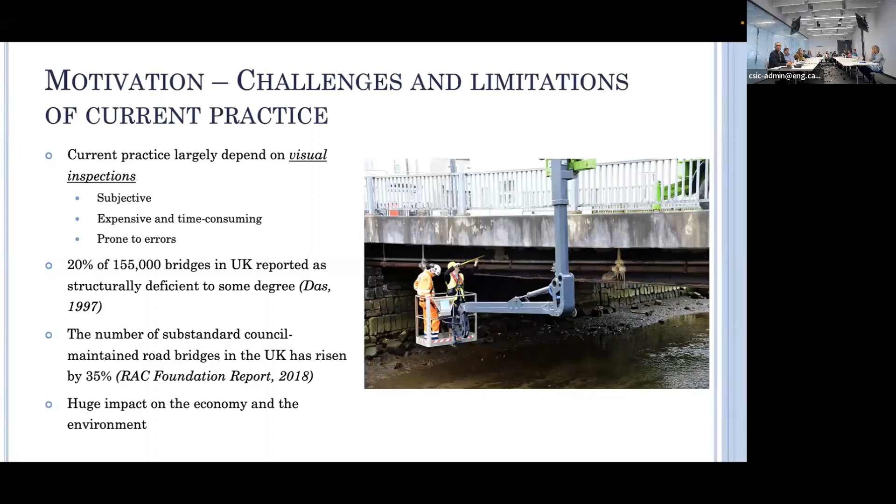As a result, thousands of bridges in the UK, and it's the same all over the world, are deemed structurally deficient, because visual inspections provide conservative results. Some of these structurally deficient bridges are being demolished and replaced, and on many of them weight restrictions are put, which has a huge impact on the economy and the environment.

Before discussing quantitative-based bridge assessment or evaluation approaches: although in practice lots of bridges are deemed structurally deficient, in the literature the studies tell a completely different story. For many bridges tested to failure, it was demonstrated in various studies that bridges are actually much stronger than we think.

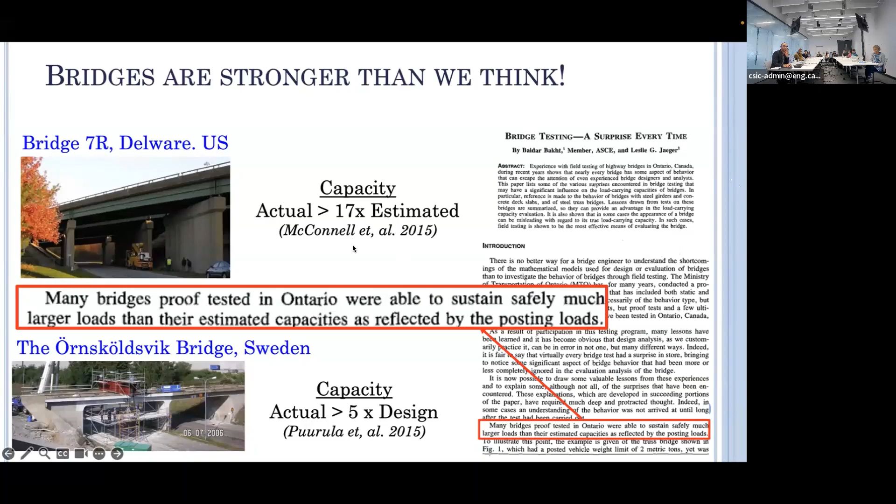For instance, there's a very good paper called Bridge Testing — A Surprise Every Time. The authors proof tested dozens of bridges in Canada, and all of them could sustain more loading than reflected by the bridge load postings. Another bridge in the US was tested to failure, and it could sustain 17 times more than the load estimated using conventional conservative approaches. So it's important to understand where the additional strength comes from.

It comes mainly from uncertainties involved in the guidelines used by practitioner engineers, mainly related to how the structural behavior is idealized or the material properties used. One of the main sources of uncertainty is traffic loading, which is highly variable, obviously. And the traffic load models included in the design or assessment guidelines are very conservative.

As an example, the figure here shows Load Model 1. All highway bridges designed and constructed in Europe should be designed to sustain its load actions. It has 2 axles spaced 1.2 meters apart, exactly the same dimensions as probably the smallest car in the transportation network, a Smart car, but it has a gross vehicle weight of 67 tons, almost 50% heavier than the 4-axle truck with a maximum gross vehicle weight of 40 tons.

This 4-axle truck generally imposes the most onerous load actions on a standard bridge, like a span of 20-30 meters. So that kind of shows how conservative the current design guidelines could be.

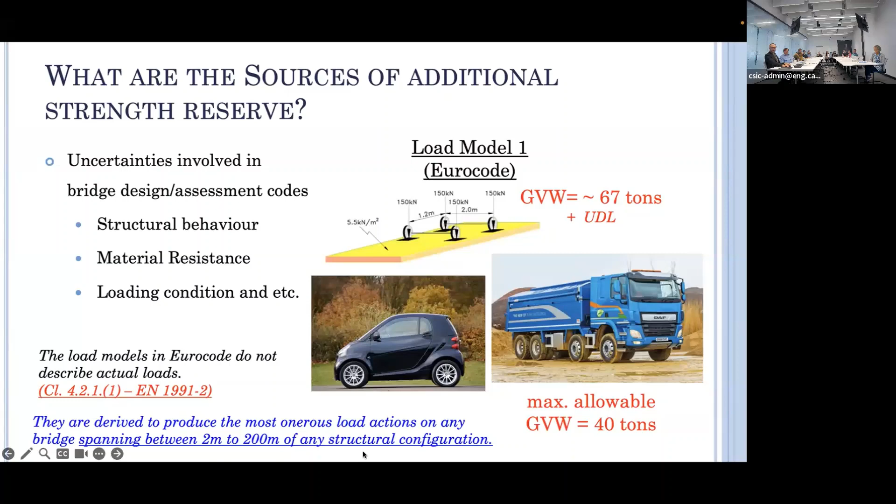So that's the main motivation to develop more quantitative and accurate bridge assessment guidelines. This project started several years ago when Network Rail had a project called Staffordshire Area Improvement, back in 2015. This project aimed to reduce the bottleneck in these 2 locations, Stafford and near Norton Bridge Village.

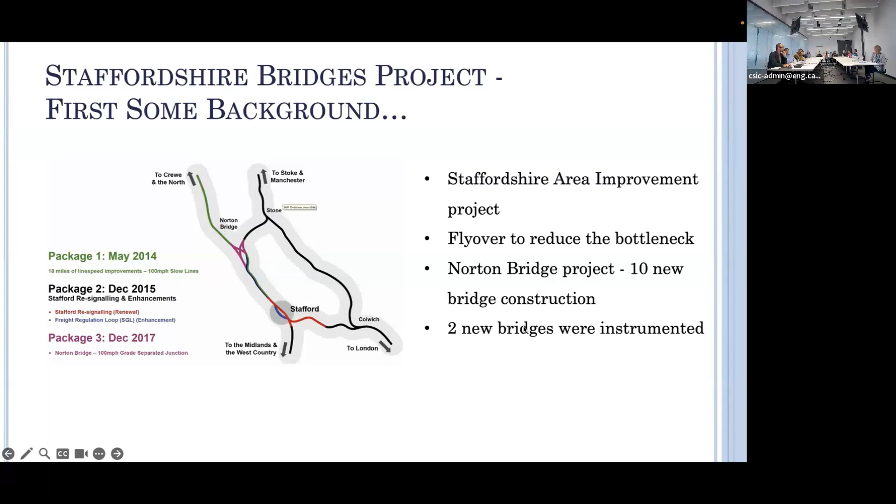Eventually, Network Rail built flyovers, and as part of the Norton Bridge project, 10 new bridges were constructed, and our research group was given the opportunity of instrumenting 2 new bridges during the construction phase, called Chebsey and Norton Bridge. They're very closely located near Stafford City.

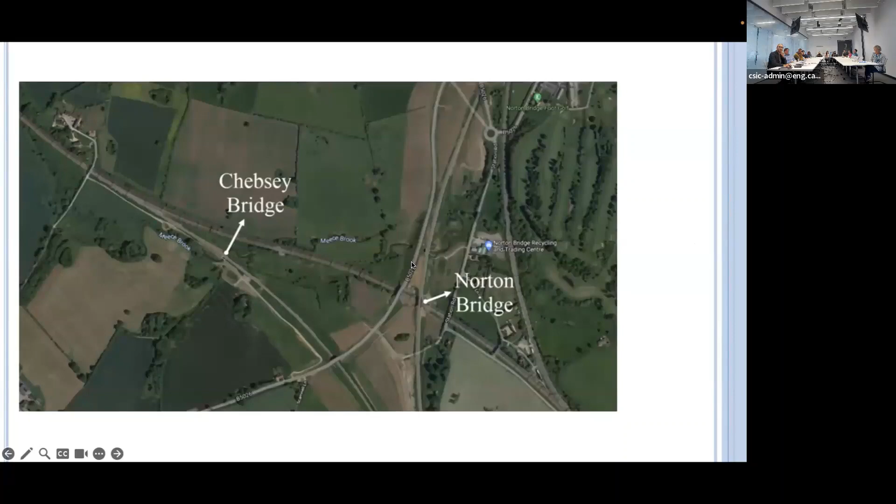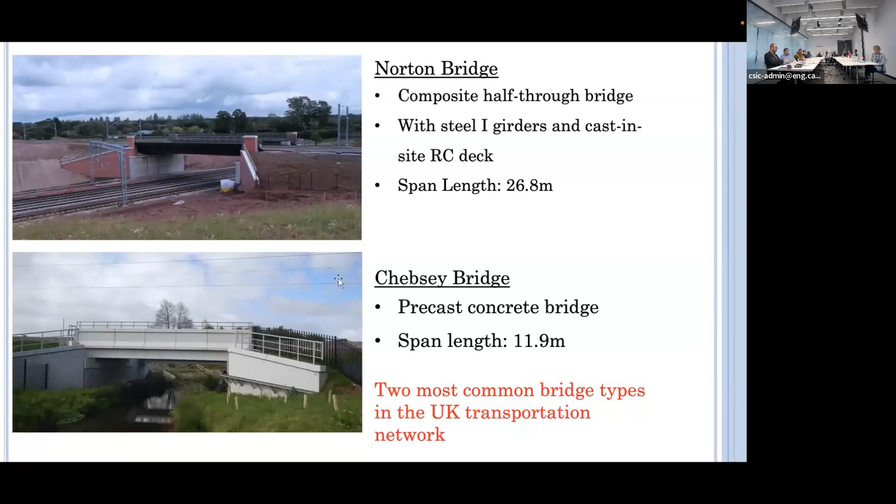Norton Bridge is a half-through composite railway bridge spanning 26.8 meters and has 2 I-shaped main girders, and Chebsey Bridge is a precast pre-stressed concrete bridge with a shorter span, about 12 meters. These are the 2 most common bridge types in the transportation network. Both bridges were instrumented with fiber optic sensors during the construction phase.

For the Norton Bridge, the top and bottom flanges of both main girders and 2 cross beams were instrumented with FBG sensors. FBGs basically measure strain and temperature. Fiber optic cables were also embedded into the reinforced concrete deck slab at the mid-span location, plus pre-stressed sleepers were also instrumented with FBGs. Overall, we had 291 FBG sensors on the Norton Bridge.

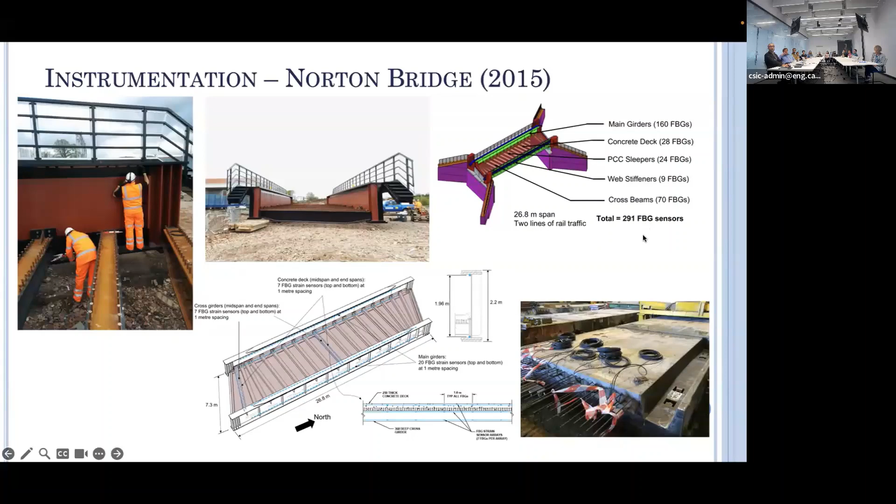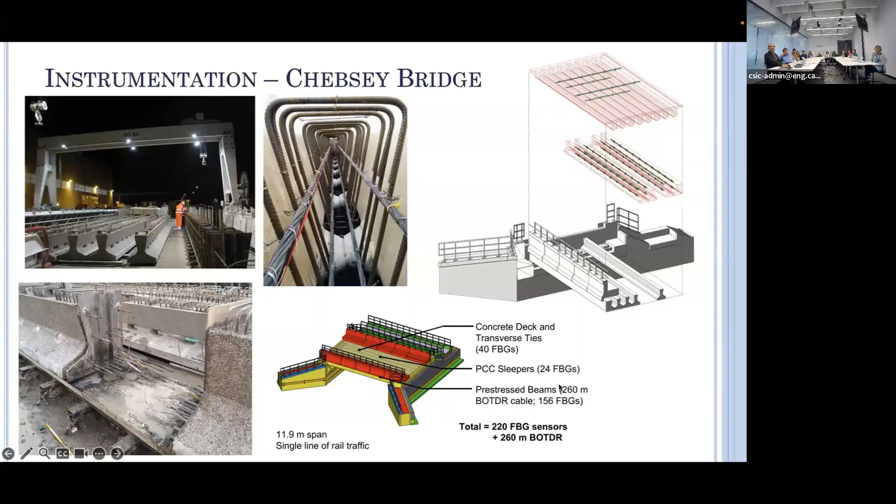Chebsey Bridge, since it's a precast bridge, the main girders were instrumented with fiber optic cables at the precast facility. So fiber optic cables were routed along the pre-stressed tendons, and at the construction site we instrumented the deck slab at the 1/4 and 3/4 span locations. Plus we have 3 pre-stressed sleepers instrumented with FBG sensors. Overall, we have 220 FBG sensors on the Chebsey Bridge.

The first 2 phases of the Staffordshire bridges were completed by 2017. The main objective of the first 2 phases was to investigate the feasibility of using fiber optic sensors for long-term bridge monitoring applications. Initially, we didn't have any permanent power on site. We acquired data during short site visits, which involved setting up a tent next to the cabinet and using a generator to power up the data acquisition systems.

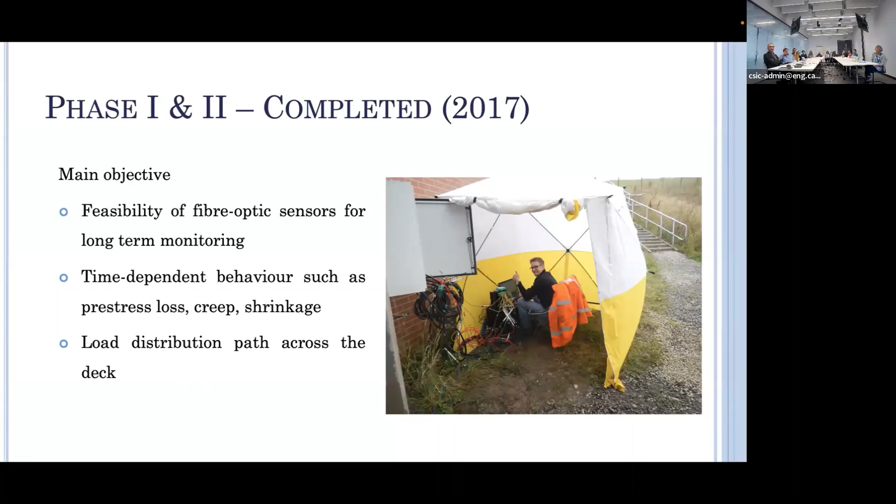The early data acquired from these bridges were mainly used to study time-dependent behaviors such as pre-stress loss, creep and shrinkage. A researcher also looked at the load distribution path from the sleepers to ballast and to the main beams. Then in 2020, we received further funding from CDBB, Centre for Digital Built Britain, to develop a continuous monitoring system for the Staffordshire bridges using a digital twin.

A digital twin is a realistic representation of a physical asset in the digital world. One of the main challenges of building the digital twin was providing this connection between the physical and virtual twin. Our digital twin system is empowered with built-in data processing algorithms, which take raw site monitoring data and extract information useful for us or asset managers, such as what's realistically occurring on site, like traffic loading, or understanding the structural behavior better.

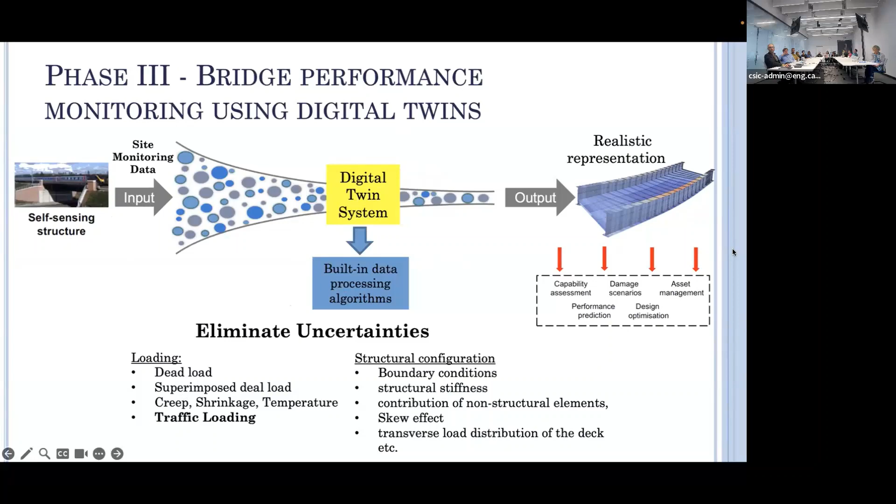Developing a digital twin system first required providing that continuous connection between the physical and the virtual twins. That required setting up a continuous monitoring system. As I mentioned, initially we didn't have any permanent power on site. We asked Network Rail to provide the power, and it was installed in January 2021. The cabinet on the right-hand side shows the data acquisition system that we've developed. It replaced the old cabinet, which only contained the ends of the fiber optic cables, with a new cabinet that has the data acquisition and transfer system.

And it was installed in November 2021, so almost 2 years ago. While Network Rail engineers were working on site and installing permanent power, we used this opportunity to install some additional sensors for several reasons. One of the main reasons, actually, we wanted to set up a train load monitoring system, since, as I mentioned, traffic loading is one of the main sources of uncertainties. Setting up a train load monitoring system required additional information.

In addition to deformation monitoring, we also required accurate positions of the axles, which wasn't possible to obtain using the existing system, or at least on both tracks. So we developed this axle detection system using laser rangefinder sensors. Laser rangefinder, short name LRF. LRF is a sensor that beams light at a high frequency in order to measure distance.

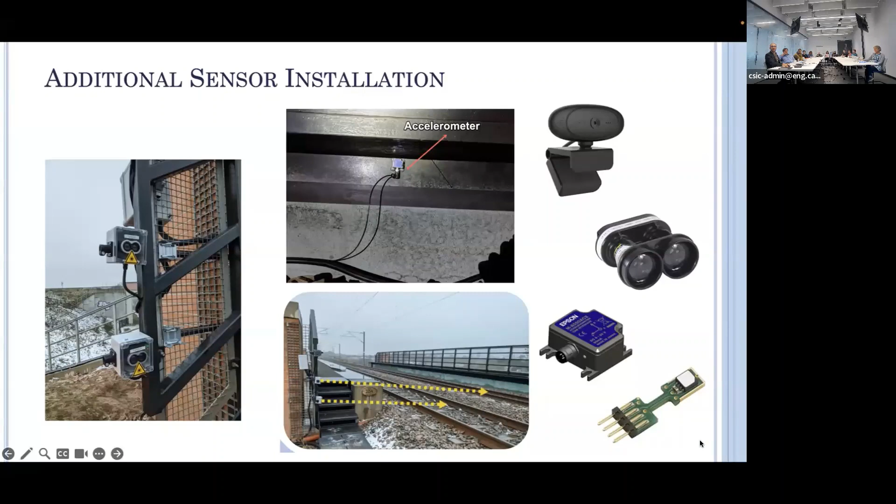Achieving time synchronization was vital for this project, especially for setting up a train load monitoring system, because the algorithm, which I will explain in the following slides, looks at the relation of the measured deformation and the axle positions in order to predict the individual axle weights.

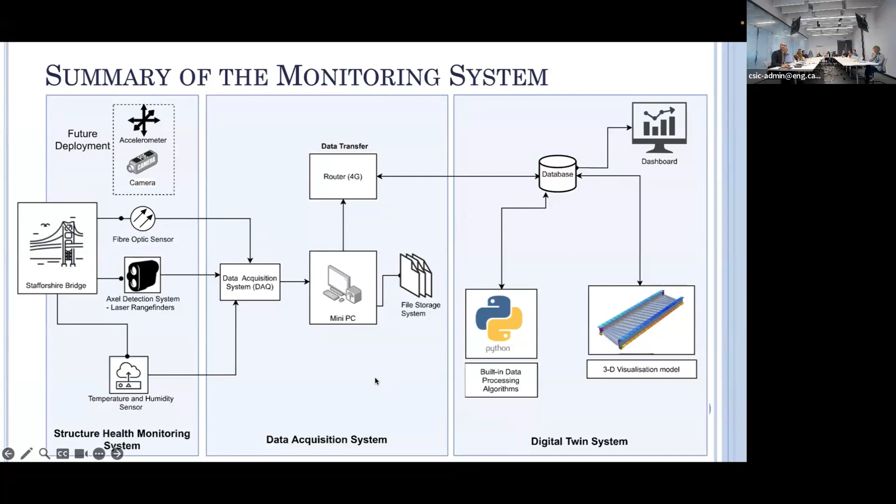Once the data is in the database, our digital twin system, which is integrated with data processing algorithms, processes all site monitoring data and extracts the useful information. In this next part of my presentation, I will show the live demonstration of the digital twin system that we have developed. This is the landing page of our digital twin system. So far, we have developed 4 dashboards, and I will go through each dashboard one by one.

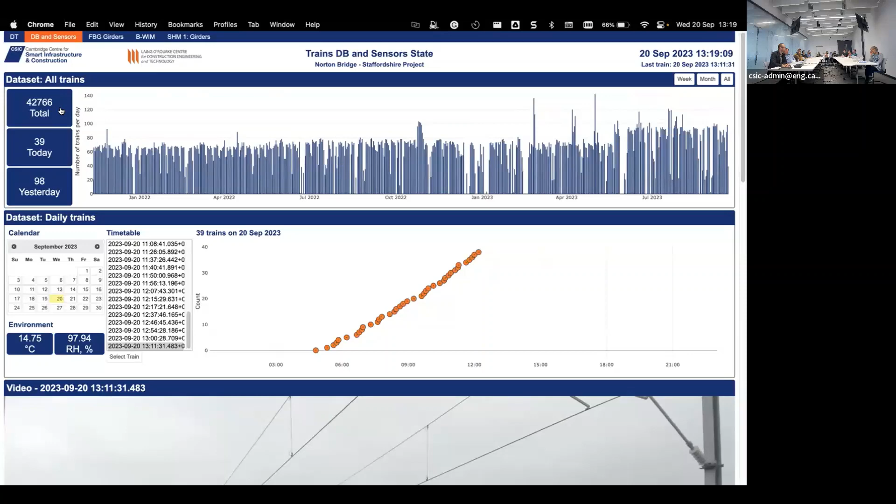Sorry. So the first dashboard is developed to access and visualize the site monitoring data. The bar plots at the top show the daily train crossings. On average, up until recently, we were getting roughly between 60 to 80 daily train crossings, but recently, throughout this summer, the daily train crossings increased to somewhere between 80 to 100. So far, we have acquired data during the crossing of more than 42,000 trains.

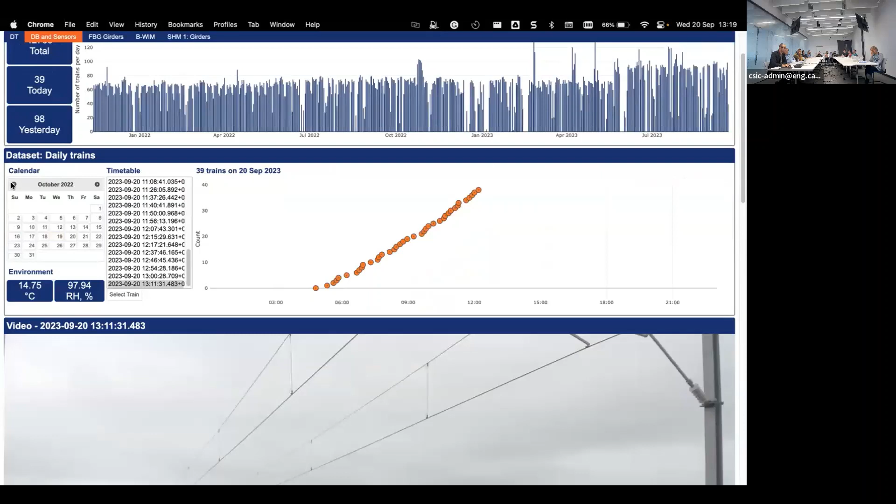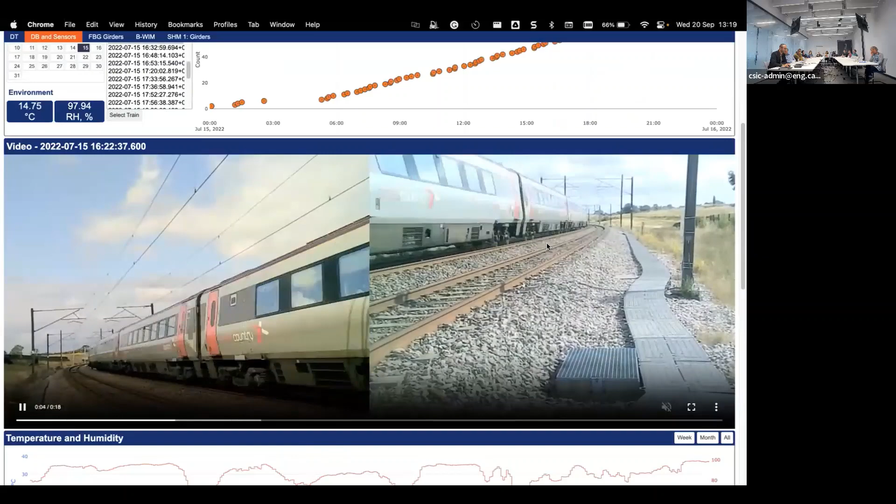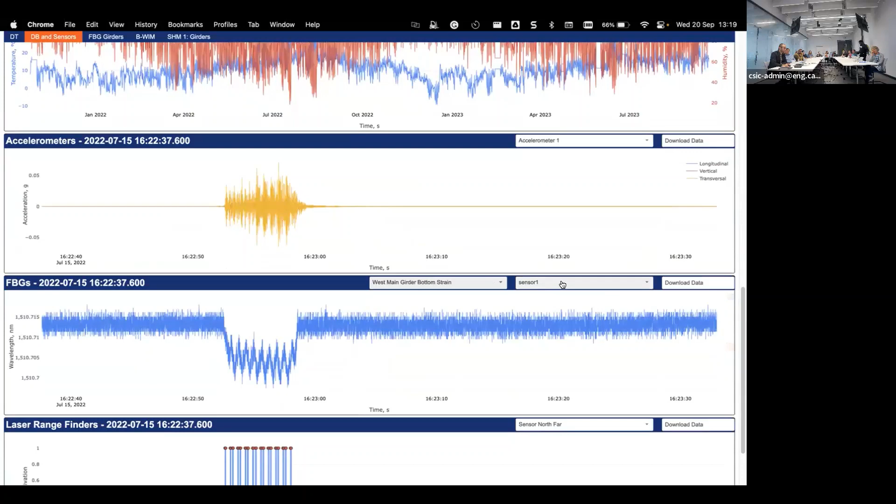Then we have the calendar and the timetable that allows us to go back in date all the way to November 2021 and select any train crossing. Here we see a Super Voyager Class 220 or 221 train crossing our bridge site, and we have these temperature and humidity time series. Then we have 4 accelerometers, and then we have FBG fiber optic strain data. We have 16 cables. Each cable has either 20 or 7 sensor nodes.

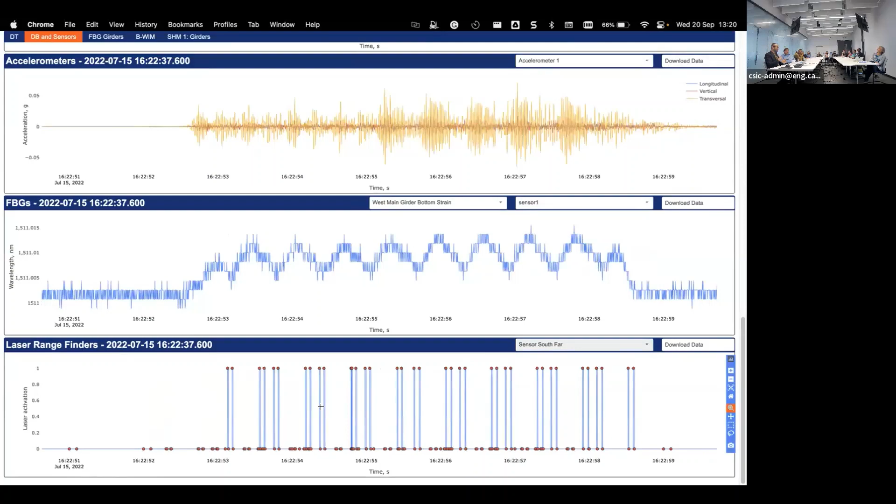Here we have these time series from the axle detector. Each peak corresponds with an axle entering or leaving the bridge. These 2 closely spaced peaks correspond to the passage of a bogie. We have this sensor at north, the entrance of the bridge, and south, which is the exit of the bridge. Knowing the axles entering and leaving, we can predict the speed and then identify the position of individual axles at any point in time.

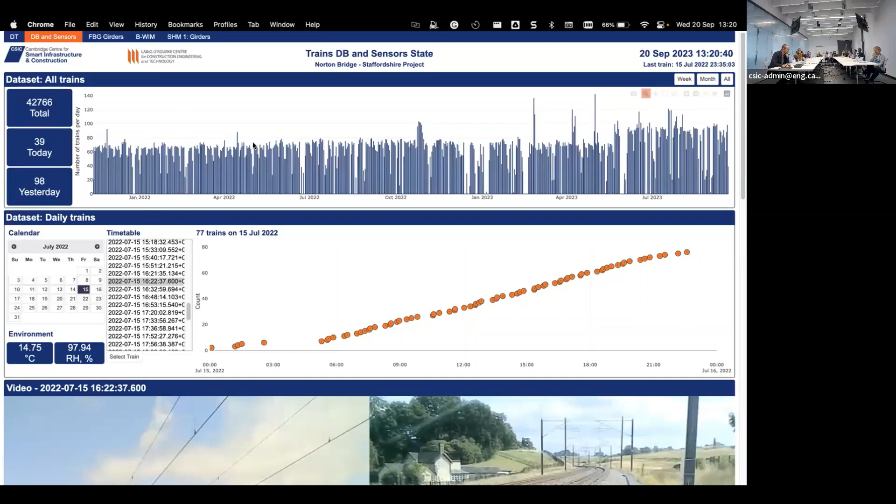So that's the first dashboard, which we mainly use for visualizing and accessing data. The second dashboard that we've developed is for the real-time train load monitoring system.

So we developed this train load monitoring system based on a technology called bridge weigh-in-motion technology. So I've included 2-3 slides to explain what a BWIM system is and what it does. So BWIM is a system that uses the deformation induced by a passing vehicle, and it solves an inverse type problem. It back-calculates the axle weights; basically the algorithm is based on the influence line, and it predicts the axle weights based on the fact that the deformation response is equal to the sum of the product of the axle weights and influence line.

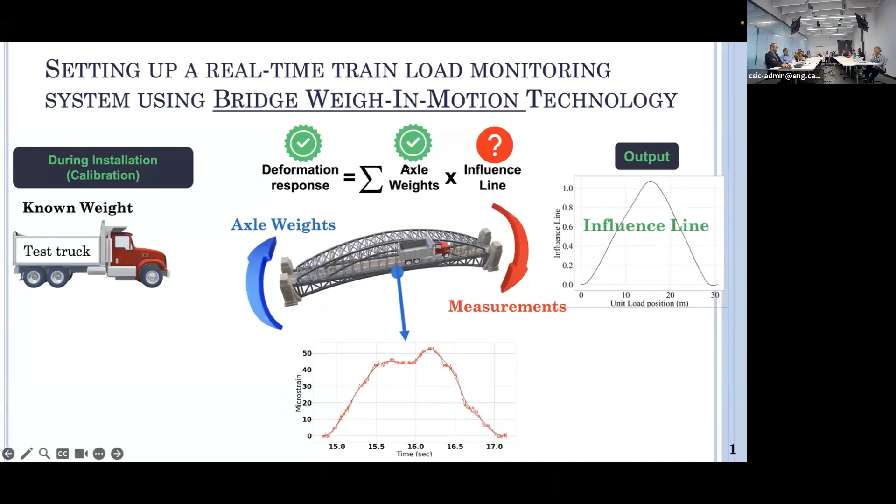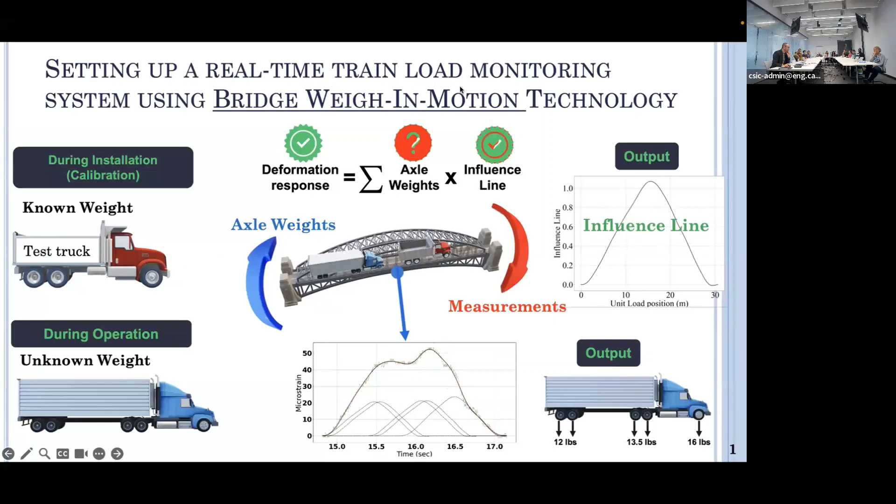So influence line is the response of a bridge to a single moving unit load. Bridge weigh-in-motion installation typically requires calibration during the installation phase, and the influence line is first obtained using the deformations obtained during the passage of a vehicle with known axle weight. So in the expression, deformation is always known because we measure it, and the axle weights of the test truck are known, and the only unknown in the expression is the influence line that we obtain during the calibration phase. Then once the influence line is obtained, during the operation phase the only unknown becomes the axle weights, which the algorithm predicts.

To calibrate the BWIM system, we use the deformation response acquired during the passage of this New Measurement Train, or the nickname is the flying banana train because of its color. It's a train developed by Network Rail to assess the condition of railway tracks. As you can see here, the train is crossing our bridge site. This train is instrumented with laser scanners, some gyros, accelerometers, etc. These laser scanners scan the railway tracks by beaming light, as you can see in this video. And each axle has a fixed weight, which is known to Network Rail, and the column on the right-hand side is the axle weights provided to us by Network Rail.

The figure on the left-hand side shows the axle detection output from the laser rangefinders. And the plot on the right-hand side shows a typical strain time history signal from a sensor at the mid-span at the top and bottom flanges of one of the main girders. Here the red and blue data markers represent the axles entering and leaving the bridge. So for instance, at 16 seconds, we know that 1, 2, 3, 4 bogies have already entered the bridge and 1 bogie has already left the bridge. And since we know the timestamps axles enter and leave the bridge, we can identify the speed, and from the speed we can identify the axle positions at every point in time.

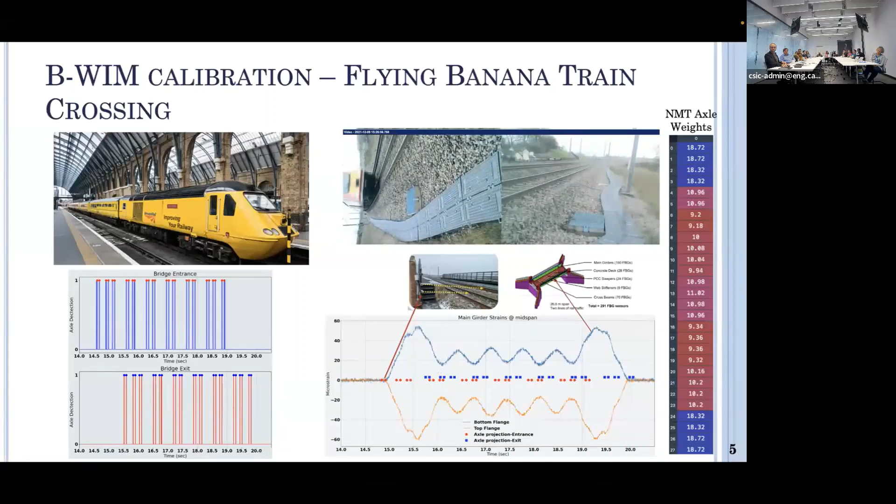Using this information, we calibrated our bridge weigh-in-motion system, which means we obtained the influence line at every single sensor location. So here it shows the 20 influence lines at the top or bottom flange of one of the main girders, I don't remember, to be honest. Along this FBG cable there are 20 sensor nodes, and this shows the influence line at every sensor location. For instance, sensor 10 is located at the mid-span, so it shows that if a unit point load moves along the bridge, it will cause this much strain, which I think is 10 to the power of minus 10. So that's the bridge weigh-in-motion system.

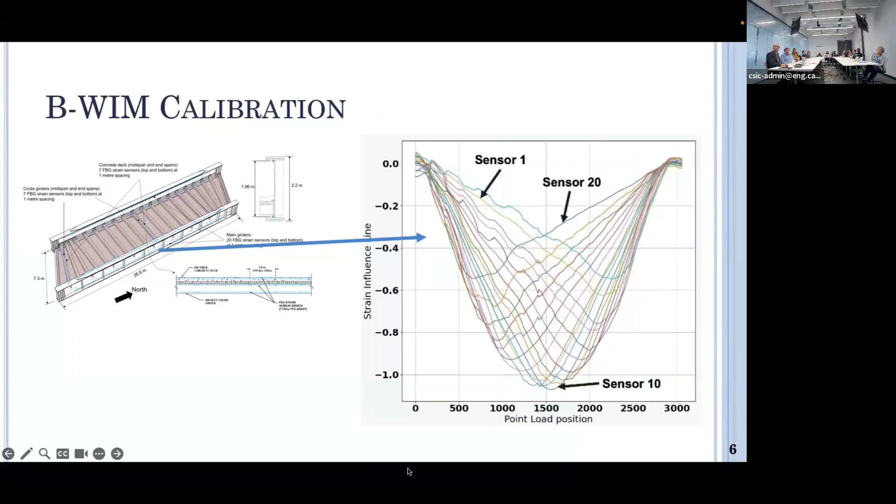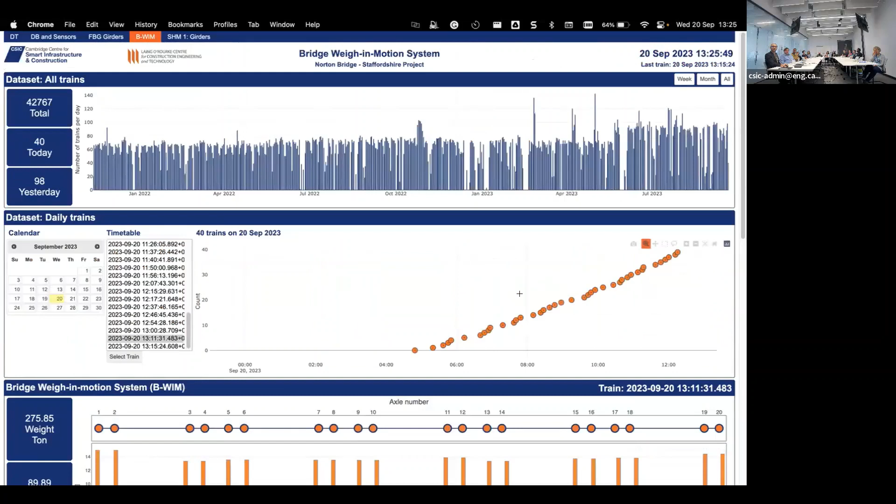So let's do some train spotting. For instance, here it shows a Super Voyager train that crossed our bridge site about 10-15 minutes ago. Yes, it's a British Rail class 221 train, which has 20 axles. It has 5 passenger cars, so it has 20 axles, and it has a gross train weight of 275 tons.

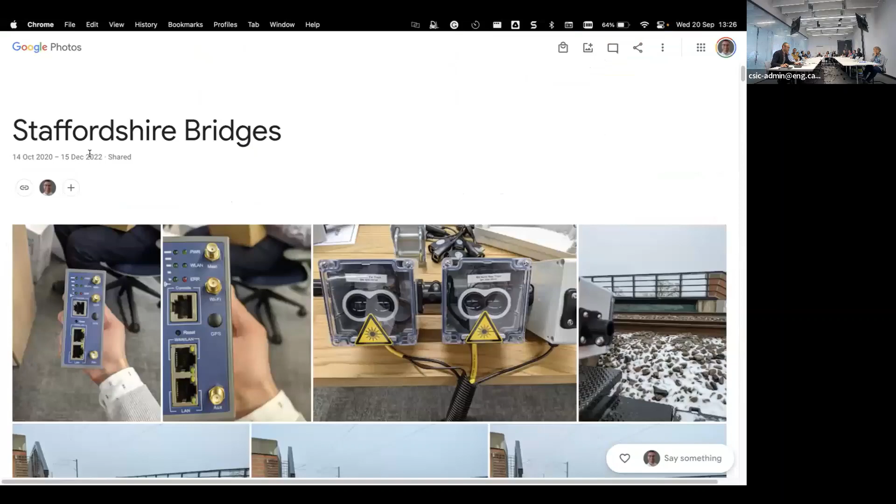So if we look at the class 221 train, it comes in 4 and 5 car set formations, and for the 5 car set formation, the total gross train weight is 281 tons, and we predicted it at 275. So it's pretty accurate. We did some accuracy study, and the gross train weight error from our train load monitoring system is within the range of ±3%.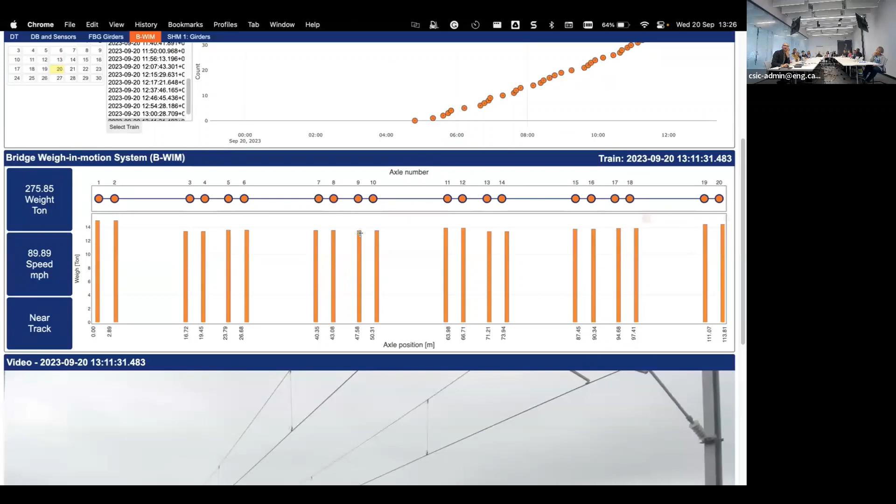Maybe I can show you a couple of other trains that crossed our site. This one in the morning. That's the same type of train. Maybe I'll look in here, it's much easier.

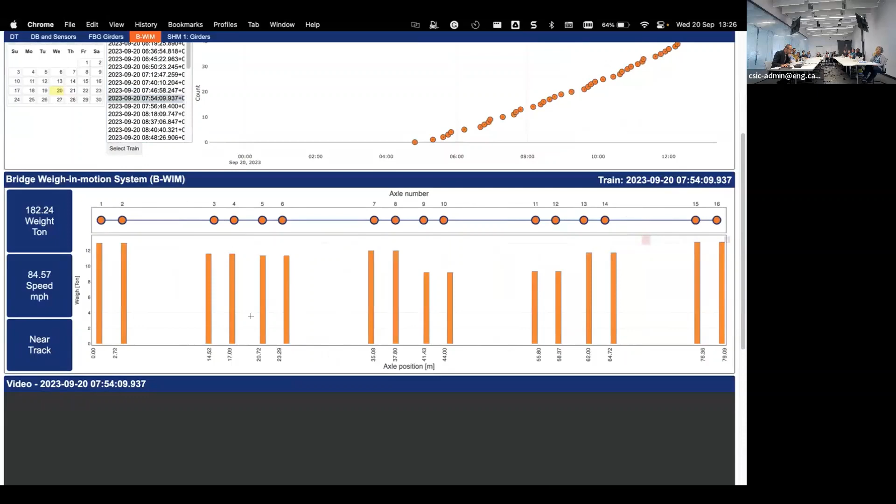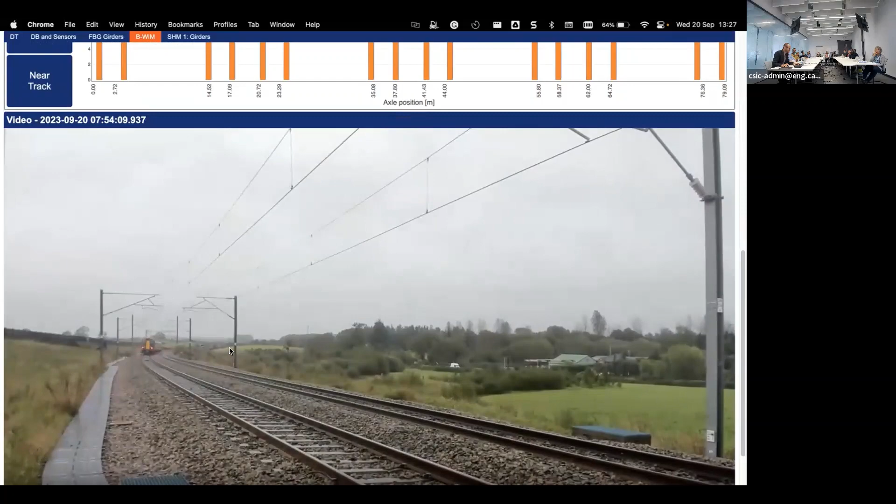Yeah, that's the class 350 train. It's a regional commuter train, which has a gross train weight of 175 tons, and we predicted 182 tons.

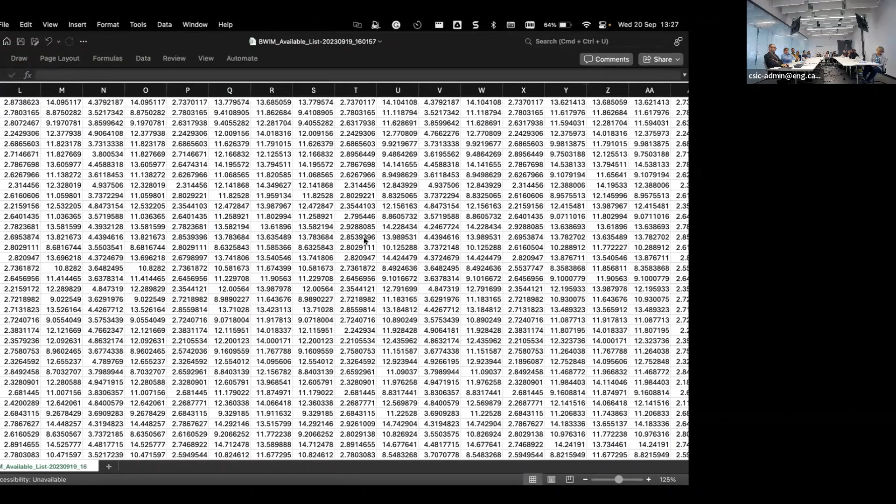Next, we developed an unsupervised train classification algorithm; we implemented two different unsupervised machine learning algorithms. First, we used an algorithm called t-distributed stochastic neighbor embedding, which takes our train loading database. It looks like this. Sorry, I can't show it. So basically, it has multiple features, which include number of axles, gross train weight, individual axle weights, individual axle spacing, etc.

So this t-distributed stochastic neighbor embedding algorithm, or t-SNE for short, takes the data, calculates the pairwise distances of every single data point in the original higher dimension space, finds the closest located data points, and projects it onto a two-dimensional canvas. So here we can see clear distinct clusters. Here's one cluster, here's another cluster. So there are multiple small clusters here.

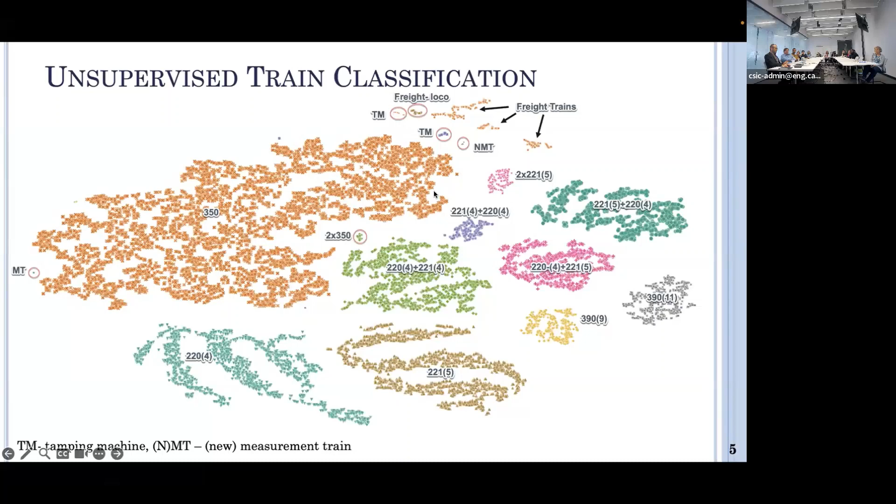So in order to identify the clusters, we use the second algorithm. It's called DBSCAN, density-based scanning algorithm, and it identified multiple clusters here. All these clusters here are passenger trains, which make up almost 95% of the data set. So these 350 trains are the regional commuter trains.

Then we have Super Voyager trains, which are British Rail class 220 and 221. As I mentioned, 221 comes in 4 and 5 car passenger set formation, whereas 220 comes in 4 passenger car set formation. They look exactly the same. The only difference is class 221 has tilting axles, so that's why it has slightly increased axle weights.

Then we have this combination of class 220 or 221 trains coupled together, which forms individual clusters. For instance, this cluster here is a combination of class 220 with 4 cars and 221 with 5 cars. Here we have 221 cars coupled together. And then the second type of passenger train is the British Rail class 390 trains,

or the model name is Pendolino trains. They are, I think, express trains. They are the fastest passenger trains in the UK's railway network, and they either come in 9-car or 11-car set formation. So that's the passenger trains.

And then we have here, I think I can zoom here. And then we have freight trains, which are in these 3-4 different clusters, and the clustering is based on whether it's loaded or unloaded, and the length of the freight trains. We have a separate cluster here, which is only the freight locomotives, which come in single, double, or triple combinations.

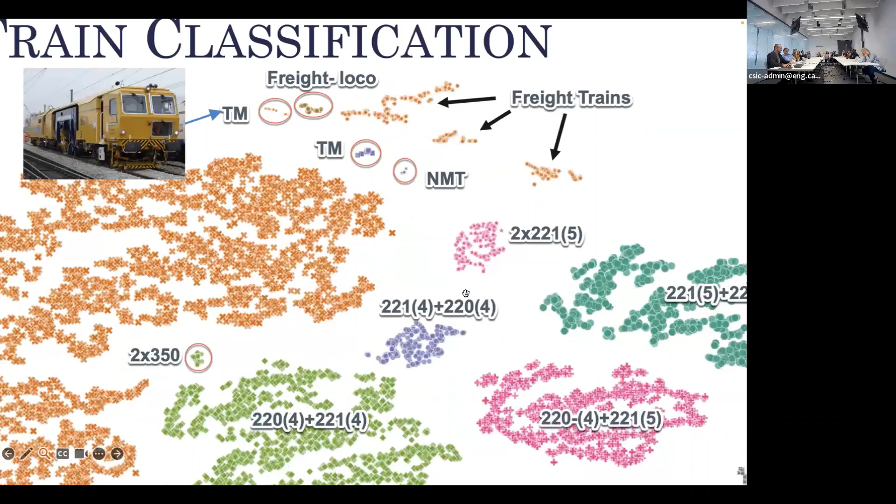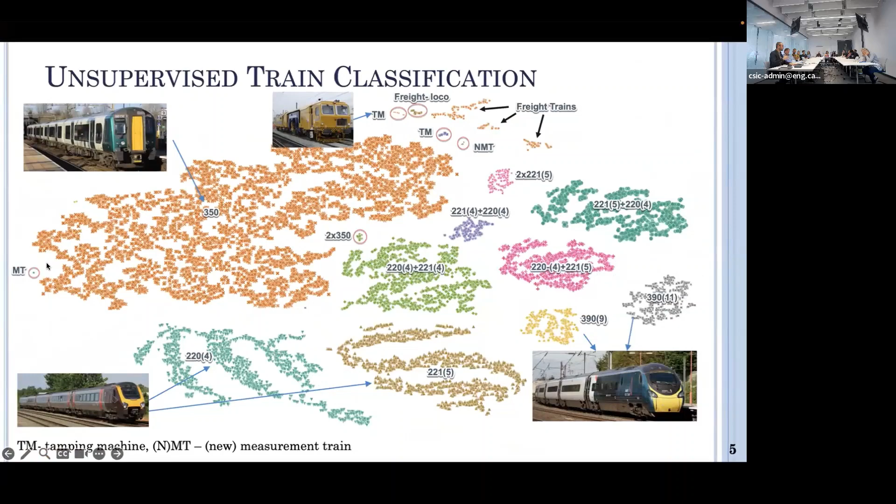And then finally, we have this new measurement train, which I showed in the previous slides, which crosses our bridge site approximately every 28 days or every month. That's the new measurement train. And then we have another small cluster here, which is another old measurement train. And I can show these. I've taken the timestamps of these trains, which I will show.

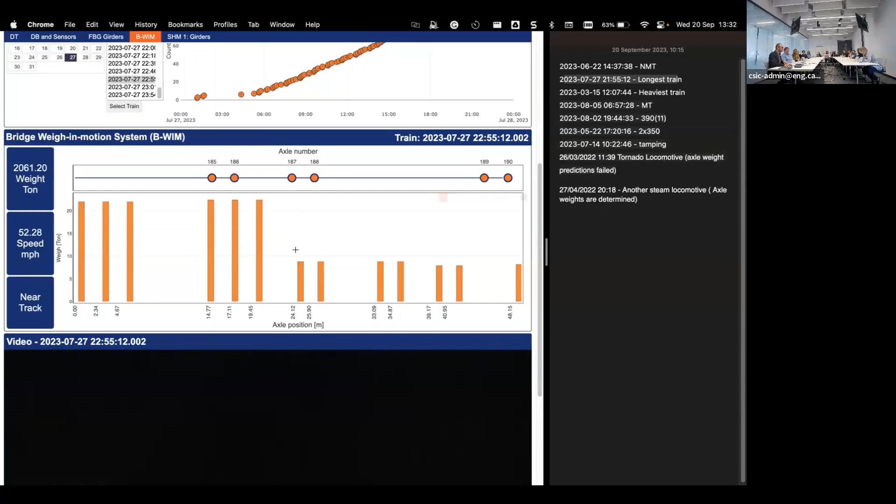Sorry. And basically the first 6 axles show the crossing of the freight locomotive, which has 2 bogies, and for most freight locomotives each bogie has 3 axles, and then the following are the freight wagons. So that's the longest.

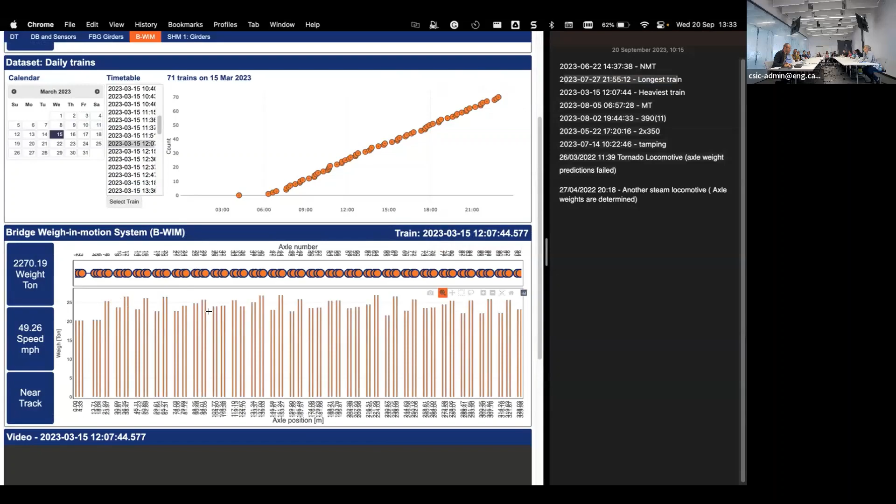The heaviest train that we have observed crossing our bridge site was on March 15, 12:07. It's this one. So the maximum allowable axle weight on the UK's railway network depends on the line. There are some lines which have reduced weight restrictions, but on this line the maximum axle weight is 25 tons per axle, and as we can see, this is a completely full freight train whose axle weights are basically on the limit.

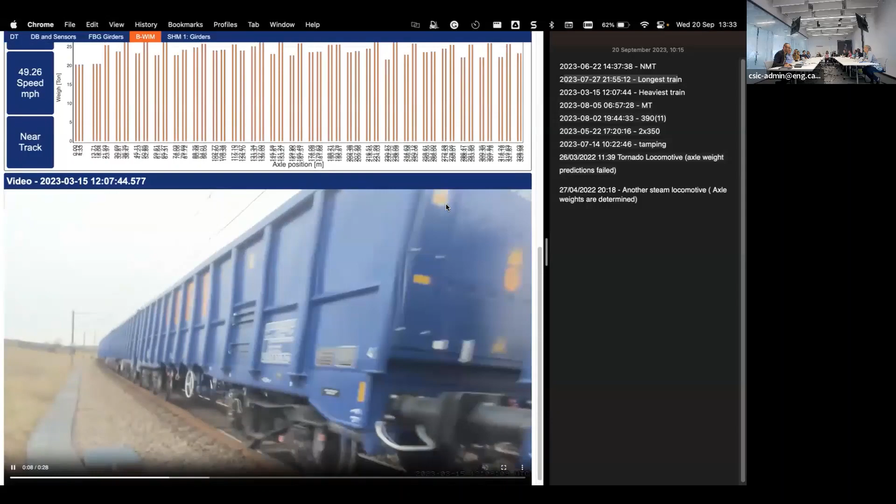And it's much shorter, but this is the heaviest in terms of both gross vehicle weight and maximum axle weights. So we can happily say that there's no weight violation happening, at least crossing our bridge site.

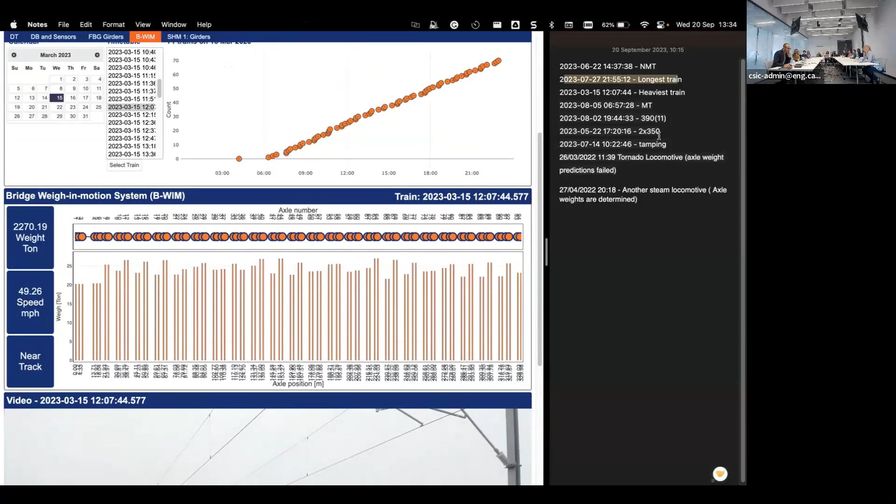Yeah, there are some other trains like tamping trains that I can show. It's a tamping train, which again crossed in July. This is the latest interesting train. Or maybe steam trains are more interesting, I guess. I need to go back in date to 2022 April 27.

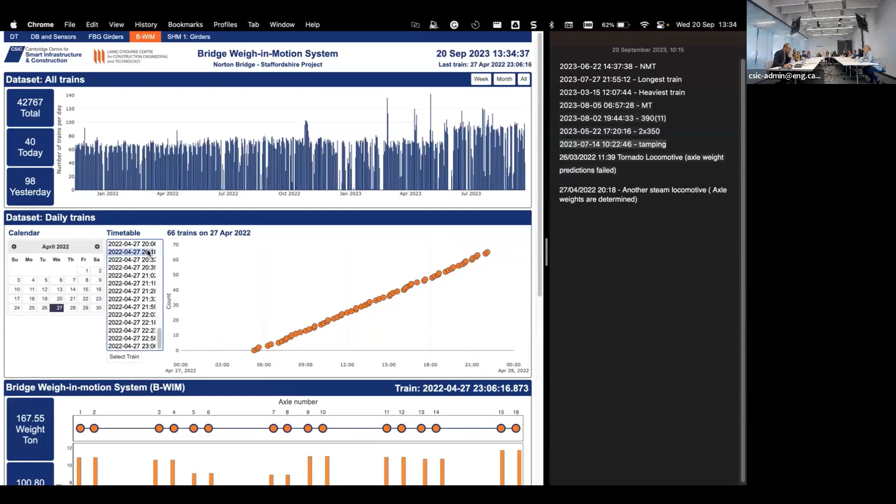That's 2018. Yeah, so it shows a steam locomotive carrying passenger cars. And then at the end, it has a normal diesel train locomotive.

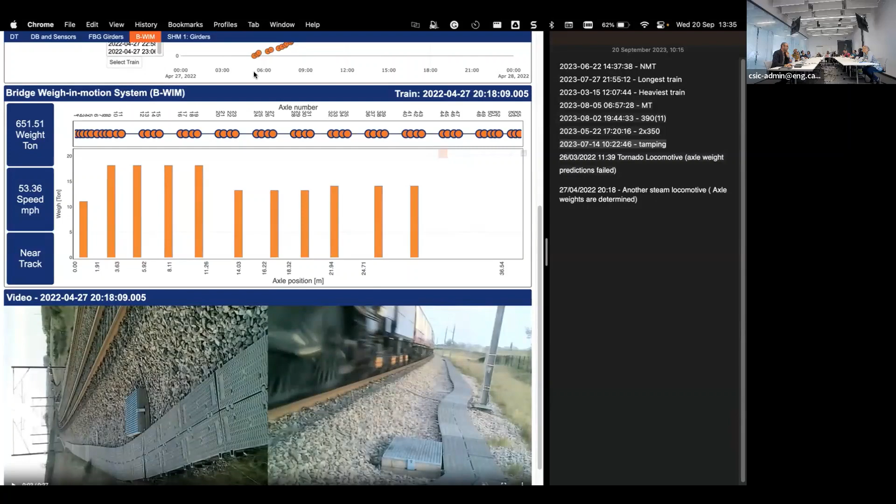The next dashboard, how much time do we have? Maybe 10 more minutes.

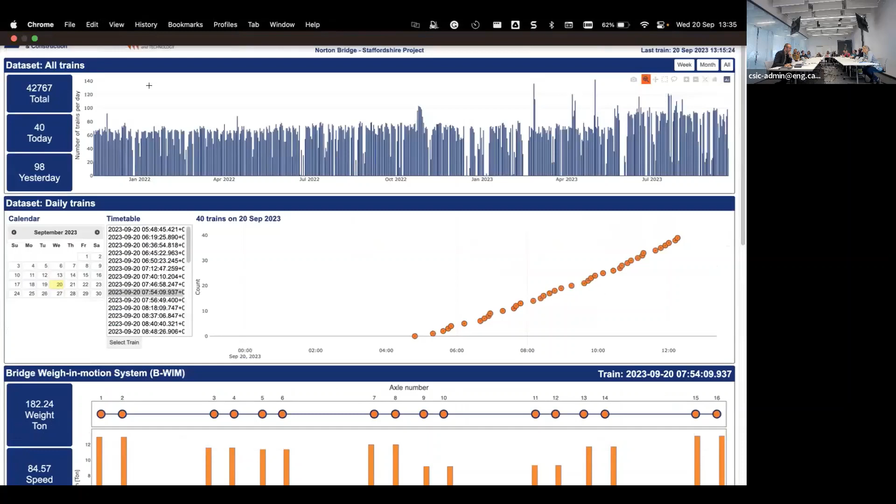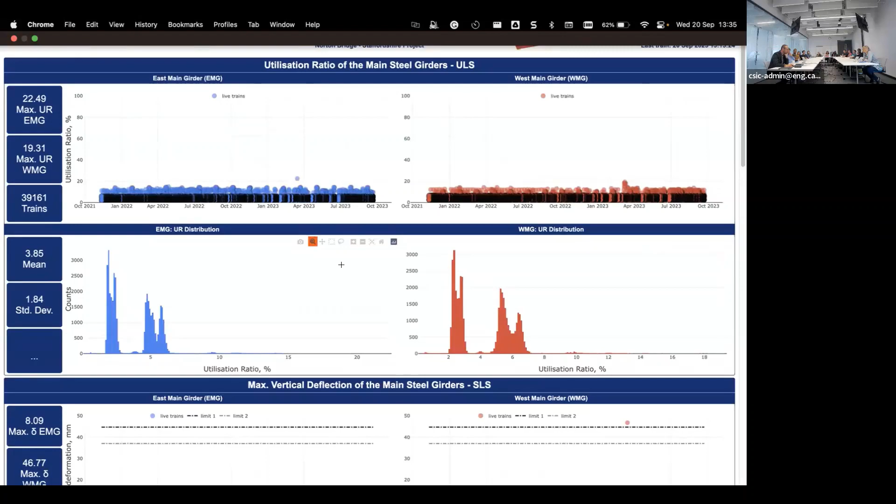The next dashboard we have developed is for the structural health monitoring of the main beams, the main load carrying elements. This dashboard shows the structural utilization of the main beams, and we look at the ultimate limit state and serviceability limit state. But first, let me explain utilization. The utilization ratio is the ratio between the structural demand and structural capacity.

The designer shared the design calculations for this bridge with us, and the governing design criterion for this specific bridge is the flexural bending resistance of the main girders, considering lateral torsional buckling. Because it's a half-through bridge, the cross beams are connected to the main girders near the bottom flange, which works in tension. This means the top flange, which works in compression, is unrestrained in the transverse direction. That's why the flexural moment resistance considering lateral torsional buckling was the governing design criterion.

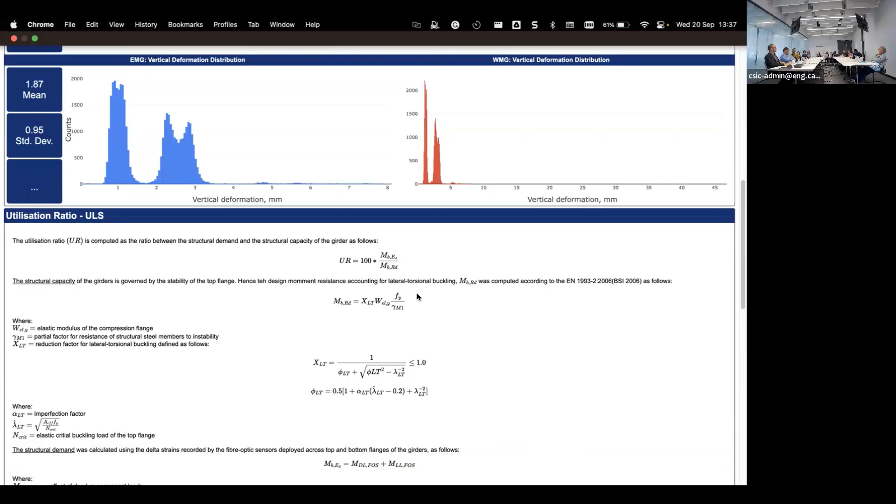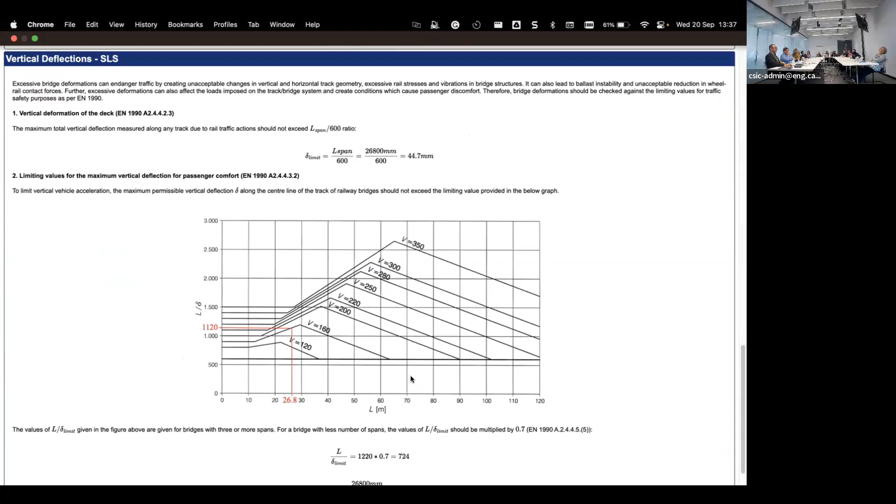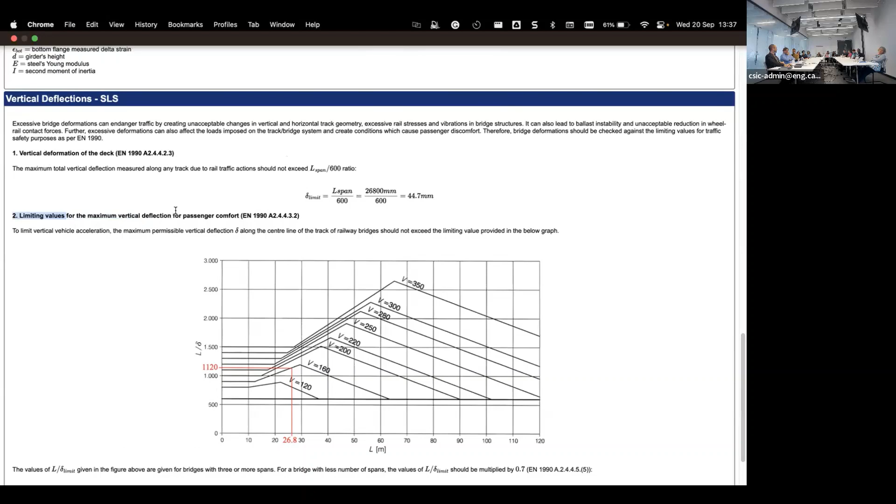This bridge was designed using the design load and all these conservative design assumptions, with an 87% utilization ratio for the ultimate limit state. For the serviceability limit state, especially for railway bridges, there are 2 critical SLS criteria, mainly controlling the magnitude of vertical deformations. The first is vertical deformation of the deck, which ensures there is no unacceptable or excessive deformation that would cause excessive rail stresses, etc. The second limiting criterion is for passenger comfort, and that's roughly 37 millimeters.

We calculated this using the site monitoring data. For the flexural bending resistance, we used the strains at the top and bottom flange. These data points show the utilization ratio calculated for the east and west main girders during every single train crossing. As you can see, the maximum utilization ratio is well below 20%. That means there is an 80% strength reserve for this structure. It demonstrates the conservativeness in the conventional design guidelines.

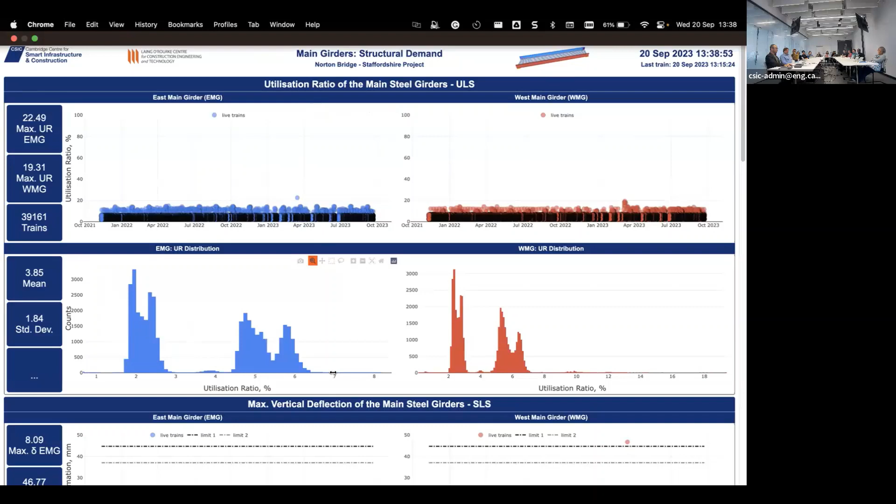In the plot below, it shows the histogram of utilization ratios, and more than 95% of the train crossings only cause utilization ratios of less than 7%. That shows the level of conservativeness in the design guidelines. The same thing can be observed for the vertical deformations. The dashed lines show the limiting criteria for vertical deformation, including the passenger comfort criterion. Here we have an outlier. This is because sometimes we get a glitch in the FBG sensors.

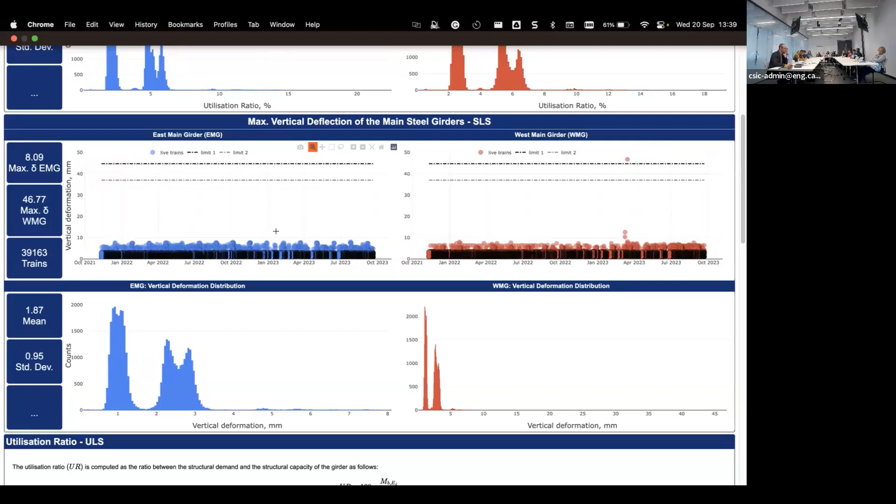By the way, this displacement is calculated using the strains at the top and bottom flange of the main girders. We calculate curvature, and from curvature we use polynomial fitting approaches to convert them into deformations. Yeah, that's pretty much the digital twin system that we have developed.

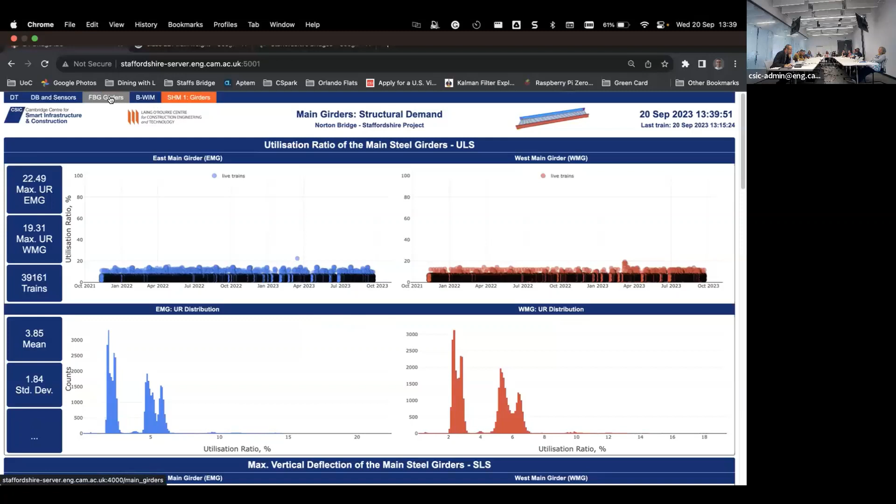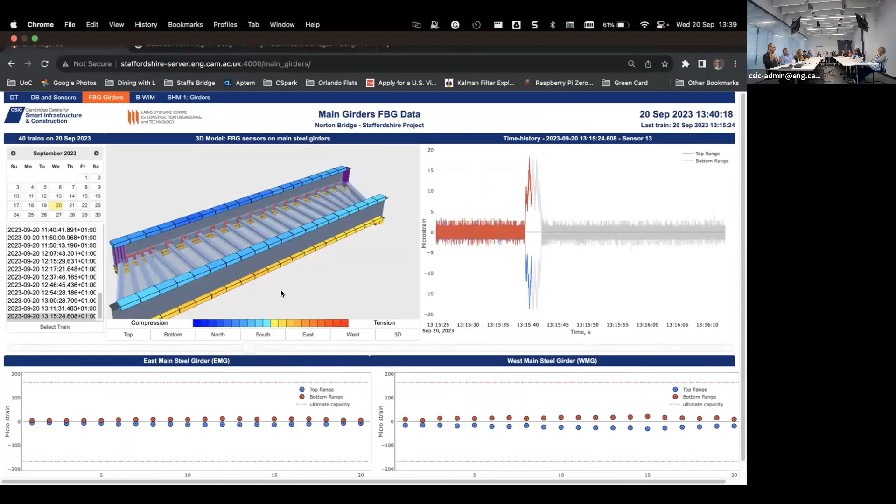We also have this final dashboard, which is still incomplete. We've developed this 3D visualization model, where so far we have only included the strain measurements from the top and bottom flanges of the main girders. But in the future, we plan to project all the useful information obtained from data processing or other sensors onto this visualization model for better visualization. Yeah, this is the end of my live demonstration.